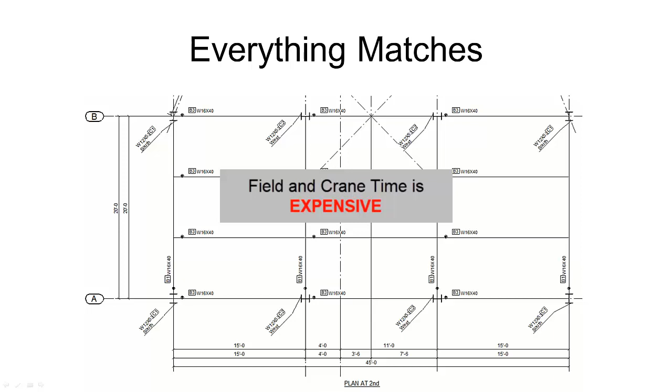And if they put the steel up the wrong direction and the crane moves on, well, the crane's got to come back, take that column up, and then rotate it around and put it in the right direction, or same thing with the beam. So it's super critical to spend the time doing this correctly in detailing versus having downtime, which is expensive out in the field.

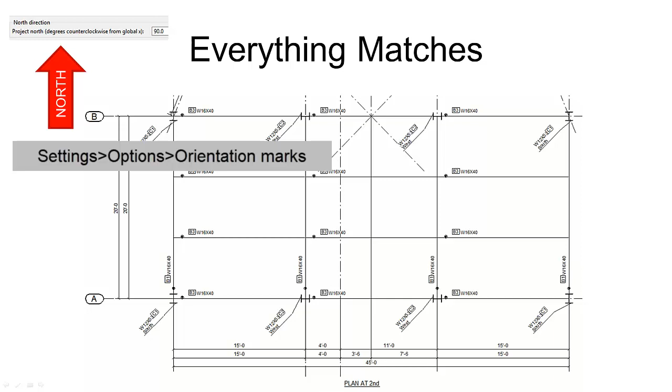All right, so let's first start with our Project North. If you go into your Tekla Structures model underneath Settings, Options and then Orientation Marks, you'll be able to set the Project North direction. Now, if you have it at 0 degrees, that's going to be basically aligned with the global positive X. Now, I have set it to be the positive Y, so that way it's going up in our plan view here. And so I set the rotation to 90 degrees.

So the angle going from 0 goes in counterclockwise direction. So if I set 90, it's going to be positive Y. If I set 180, it's going to be negative X, and so on.

All right, so from here, I then in the same options decided to set the mark location, the preferred location for piece marks. So on beams, I want my piece marks to typically be towards the left end of the member. And then north and south beams, or up and down in plan view here, we want them to be towards the bottom. So this is the next setting that we've set up, and typically we want this defaulted to left.

Now, what this means is that if we're doing our beam and column drawings, then essentially we want the front web or the front view of those assembly drawings to be lined up basically here on the south side of the building, or the south side of the beam. So that way the left end or the piece mark is towards the left.

So then if we look at beams that are going north and south, we want to be looking towards the west, and we're looking at the east face of the column or the east face of the beam web. Okay, so just think about that. Look at the piece marks there. They're towards the bottom and towards the left. And so when we make an assembly drawing, we want to see the piece mark to be towards the left.

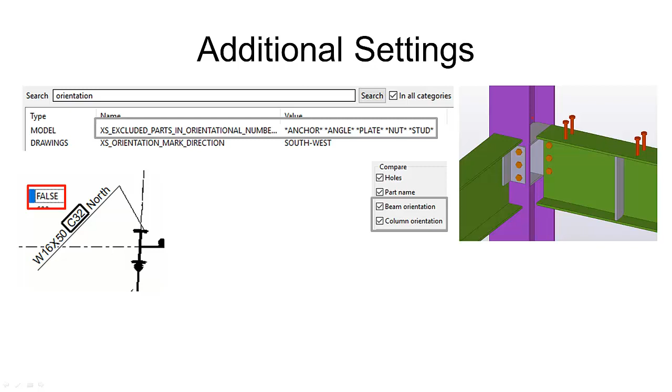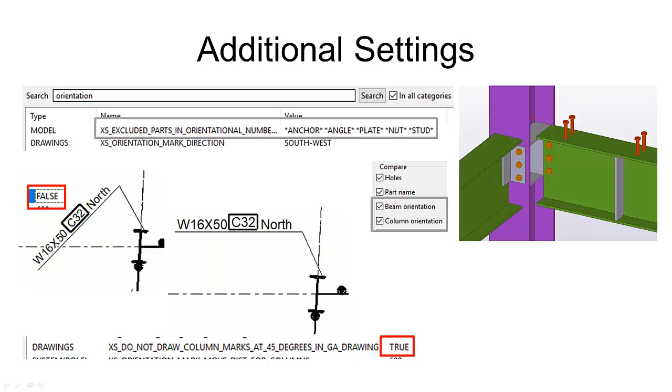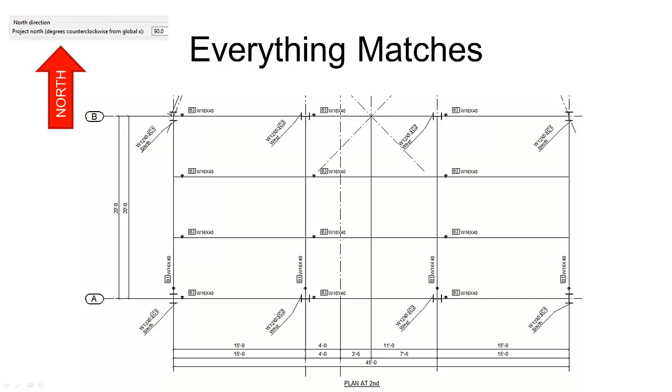So let's quickly do a recap. The biggest thing to take away is that you want everything to match. All of the different settings that control orientation and piece marking and the way that you model, you want it to match. So let's start by defining our project north, then deciding what preferred end do we want the marks to be located at, and then let's model in the steel and set our viewing direction on assemblies so that way everything matches that. So here, south or east in this particular case.

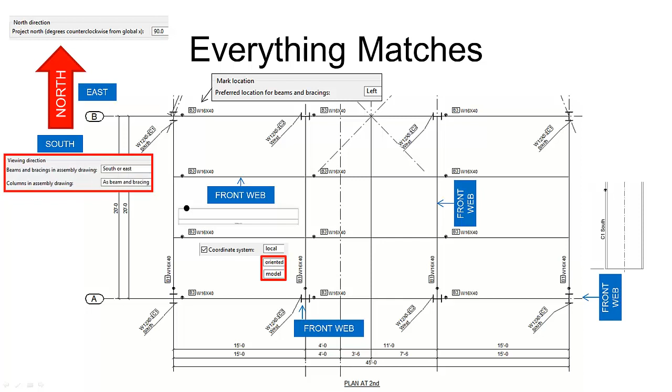And no matter whether we're working in the local, oriented, or model coordinate system for our beam or our column assembly drawings, we're going to set the viewing direction as well as model in the steel and set its rotation in a way that will make sure that the drawings always match. Next, we're going to set our numbering settings, and if we're going to use the face direction, for instance, on columns, and we want beams to be different between 90 and 0 degree rotation, then we're going to check the beam orientation and column orientation in our numbering settings.

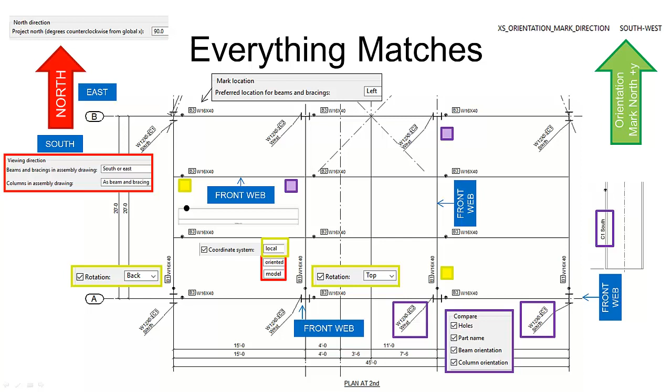And again, if you're using orientation marks and you're going to correspond that with your orientation numbering settings, make sure that you understand that the orientation mark north is hard-coded to the positive Y, and it doesn't necessarily correspond to the project north, so you'll have to just figure that out. And the direction that's set here on the advanced options is always the end of the beam or the face of the column flange that's closest to the faces defined in that advanced option. So again, here the left or west end of the beam and west column flange, or south column flange and south or bottom end of the beam.

Lastly, again here, we're going ahead and setting that the column piece marks are pointing to the face, the top face of the flange of the column, so that way we can easily see where the mark is and see that mark face shown on the assembly and on the erection drawings.